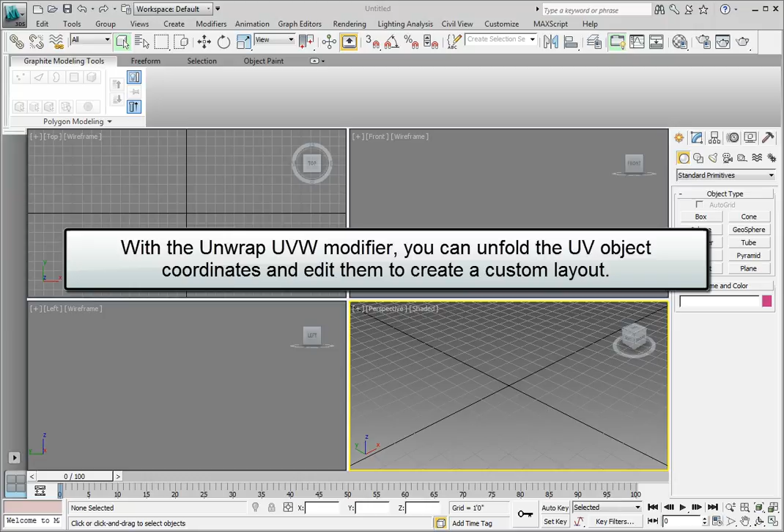With the Unwrap UVW modifier, you are able to unfold the UV coordinates of an object and edit them to create a custom layout. Once the UV coordinates are laid out, you can create an image of the layout that can be opened in any paint program you use. In this exercise, we're going to automatically unwrap an object in our scene in order to export the layout for use in an image editing program.

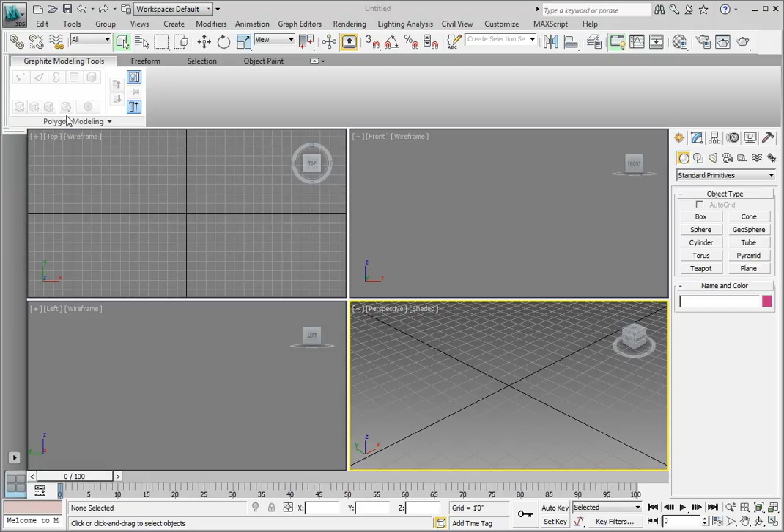We'll start by opening a new file. Click on the Application button, select Open, and navigate to the Datasets directory for Chapter 4. The file we want to load is the Chapter 4 Unwrap UVW 01.max file. Click the file name to select it, and click the Open button in the lower right-hand side of the dialog to open the file.

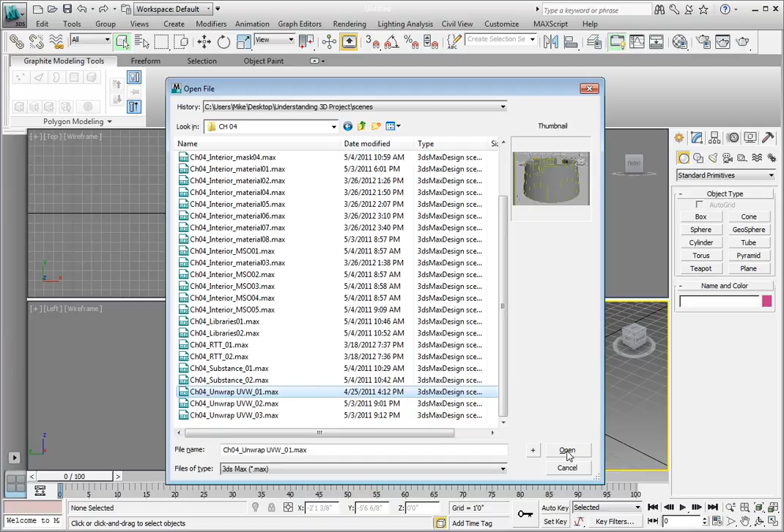Before we move on, let's incrementally save this, so we can get back to the original file if we do something to mess up our working file. Click on the Application button, Save As, and click the Increment button to save it as a new revision of the file. If it asks you whether or not you want to overwrite an existing file, click Yes. Go ahead and overwrite that file.

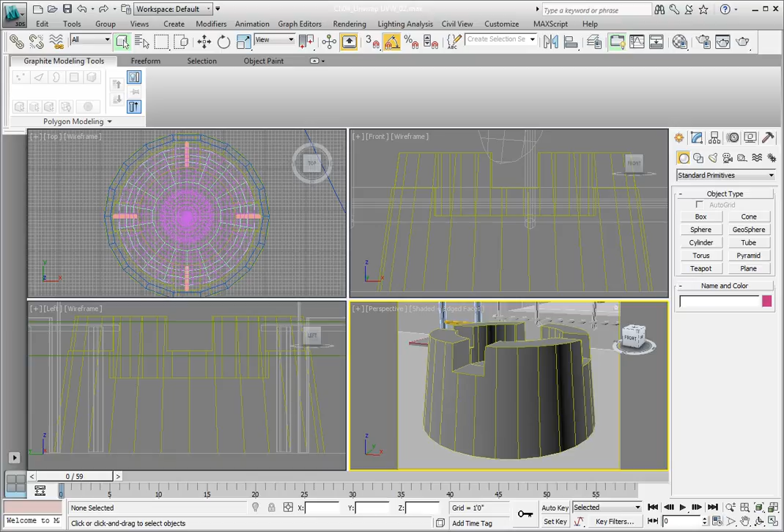You are presented with a close-up view of the base of the lab equipment that is hanging from the middle of the room. We're going to apply an Unwrap UVW modifier to this in order to get a usable UV layout we can work with in a paint program. Start by selecting the Equipment Base 001 object located at the center of the room. Once it's selected, click on the Modify tab to switch over to the Modify panel. This is a ProBoolean object that's been made up of 4 3D primitives.

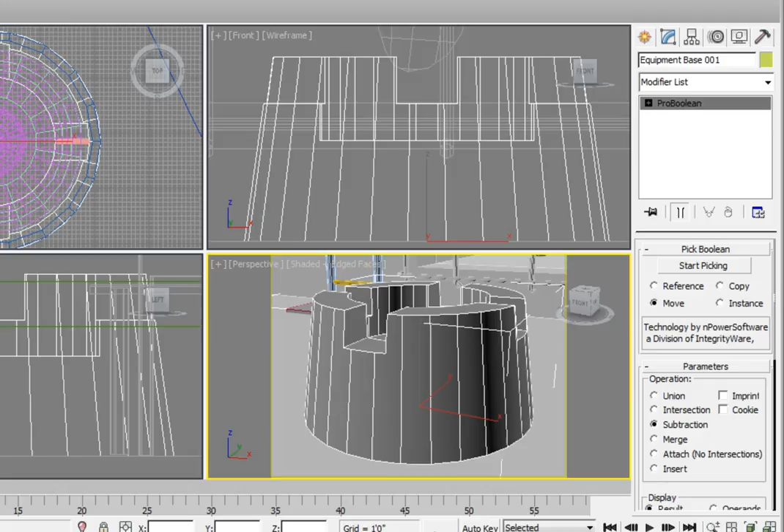Click on the down arrow to the right of the modifier list to open the modifier dropdown. From the drop-down list, scroll to the bottom and select the Unwrap UVW modifier to place it in the modifier stack. When you first add the Unwrap UVW modifier, you notice that the edges of the equipment base object turn green. This indicates that they have separate mapping coordinates applied on each face.

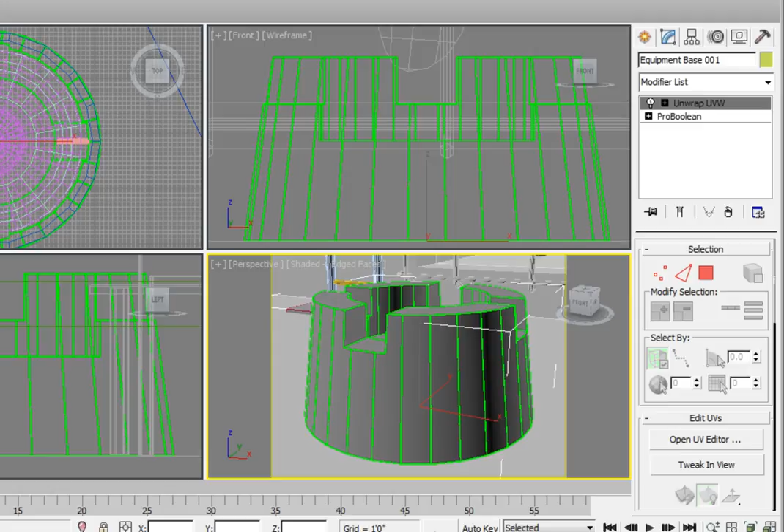Our goal is to automatically unwrap the object and make it a usable template. We're going to do this by opening the UV editor. In the Modify panel, Unwrap UVW modifier, Edit UVs rollout, click the Open UV Editor button. Once the UV editor opens, you'll see a work area that shows the UVs based on each polygon, along with several menus, toolbars, and rollouts.

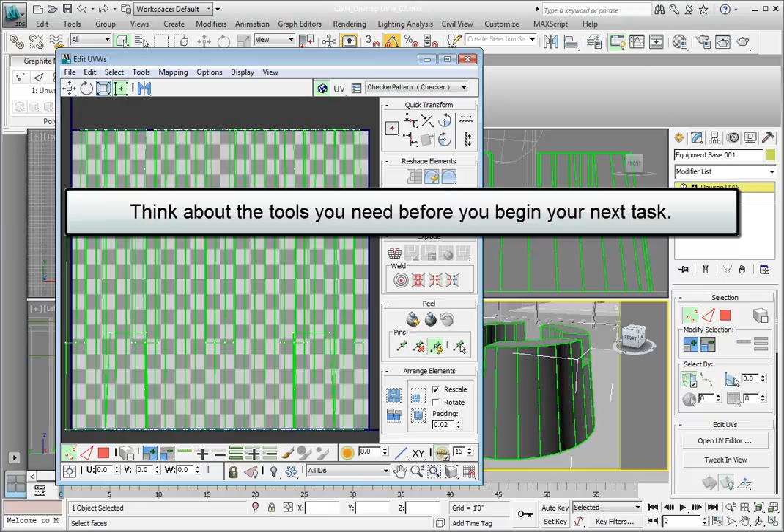If you look at this editor and you feel a little bit overwhelmed by the number of options, keep in mind that we have a very specific task to accomplish. And in order to accomplish that task, we only need to use a few tools. This is true with nearly all aspects of 3ds Max. When you think through the tools you'll need for a particular task, you eliminate all the other options. This is a very good working methodology for anything you need to do in nearly any program.

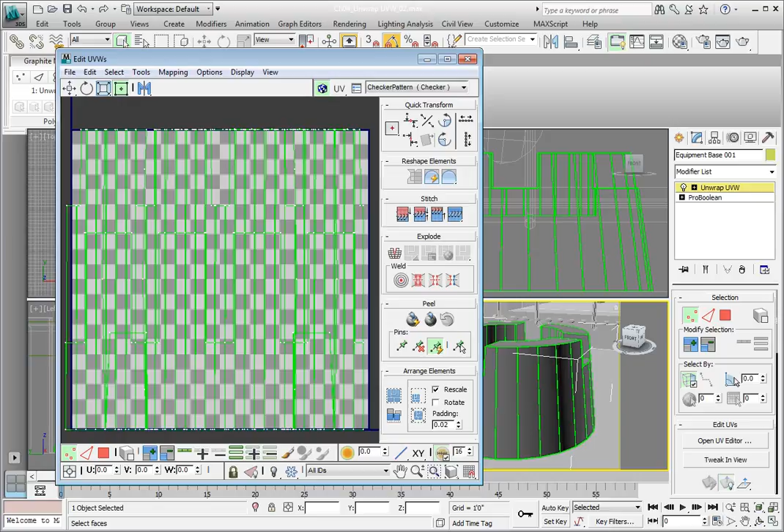We will work at the sub-object face level. In the toolbar at the lower left-hand side of the Edit UVWs window, click on the Polygon sub-object. You may see some polygons that are already selected. We want to select the remaining polygons. To do this, press Ctrl-A on the keyboard. This is the shortcut for Select All. And it will select all of the polygons in our currently active object.

In order to accomplish the task of quickly unwrapping the UVs on this object, you're going to perform an operation called flattening. We can find the Flatten Custom option in the Explode rollout on the right-hand side of the UV editor window. Click and hold the Flatten Custom button and choose the Flatten options from the flyout menu. This opens the Flatten Mapping dialog.

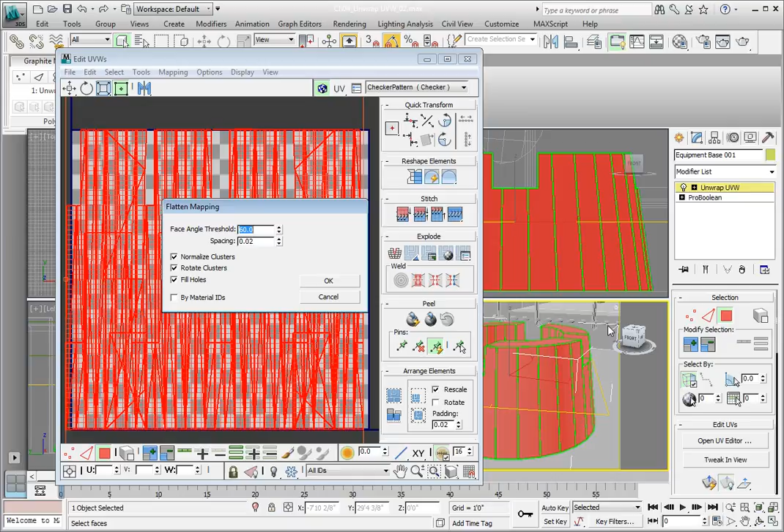In the face angle threshold value, enter a value of 60 and press enter. This will set the threshold angle to 60 degrees that will be used for the calculation of the UV unwrapping. We'll leave all the other options at their default. Then click OK to flatten the mapping coordinates on the object. You should see an arrangement of polygons that now represent the unwrapped version of the UVW coordinates.

In order to get this layout into a program like Photoshop, we need to render the layout into an image. In the Tools menu, select the Render UVW Template option. This opens the Render UVs dialog and will allow us to render the UV template based on some parameters that we set. Since we don't need this to be a very high resolution, change the width value to a value of 512 and then press enter. Then change the height value to a value of 512 and press enter.

We're going to change the mode to the normal option. In the mode drop-down, choose the normal option in order to render the direction of the surface normal into the UV template. Now that we set our options, click the Render UV Template button at the bottom of the dialog. This will render a UV template and allow us to save it to whatever format we need.

Not only does this render color information based on the normal direction of the surface, it also renders the alpha channel for the UV layout. To see the alpha channel, click on the Display Alpha Channel in the toolbar of the image window. You can see the alpha channel represents the outline of each of the UV map clusters. Click the Display Alpha Channel button to return to the full color view.

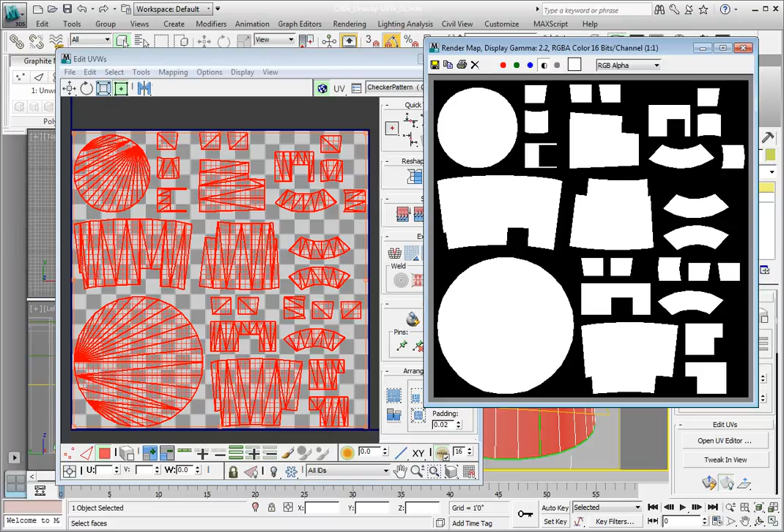We can save this template as an image by clicking the Save button in the upper left-hand corner of the image window. In the Save Image dialog, you can enter whatever file name you like and choose from any of 3ds Max's many image formats. We're not going to save this file right now. However, if you'd like to, you may go ahead and save the file out in order to edit it later.

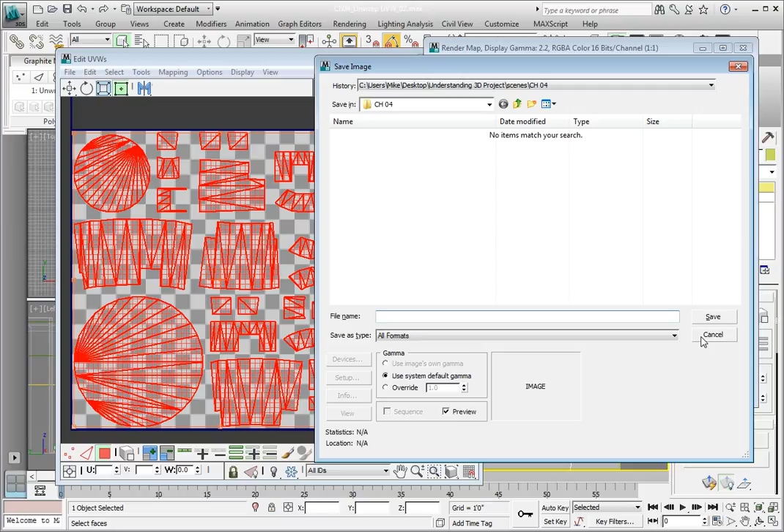Click Cancel to close the Save Image dialog box, close the Render Map Display window, then close the Render UVs dialog. We've completed editing our UVs. Go ahead and close the Edit UVWs dialog box. In the modifier stack, click on the Unwrap UVW modifier in order to close the subobject. We've now unwrapped the base object and made it ready for a custom texture map. Press Ctrl S to save the file.